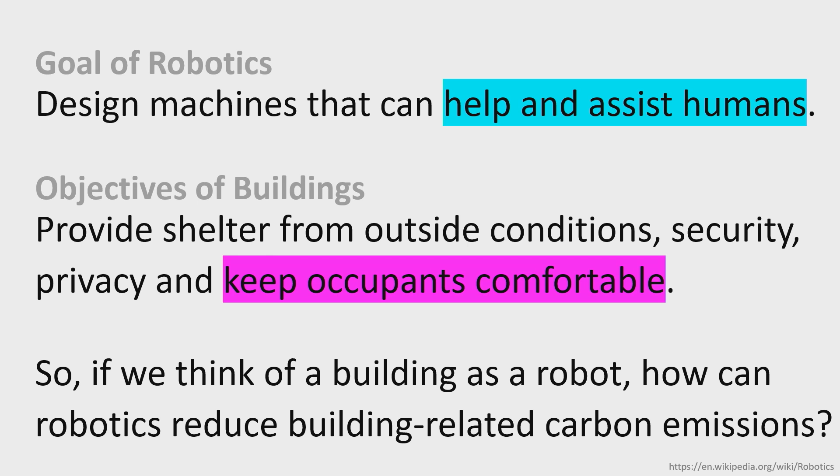So again, coming to my soul searching, what is robotics? I looked to Wikipedia, and basically the goal is to design machines that can help and assist humans. That's, I guess, broad enough. And so I thought, well, the objective of a building is to provide shelter from the outside conditions, security, privacy, and keep occupants comfortable. So again, approach this from the perspective of, does this work? If we think of a building as a robot, how can robotics reduce building-related carbon emissions? And feel free to interrupt me anytime. This should be as interactive as possible.

And I try to use some of the slides that I often use when I talk about buildings and climate change, but then infuse some ideas and opportunities where individuals with a background in controls and in sensors and actuators can make a positive, really substantial impact on climate change. So again, I thought about, well, what do we have? We have these three relationships here, and I'm mostly going to focus on first giving a sense of how we think. And then, as I said before, I'm always going to link this in to what various kinds of robotics could do.

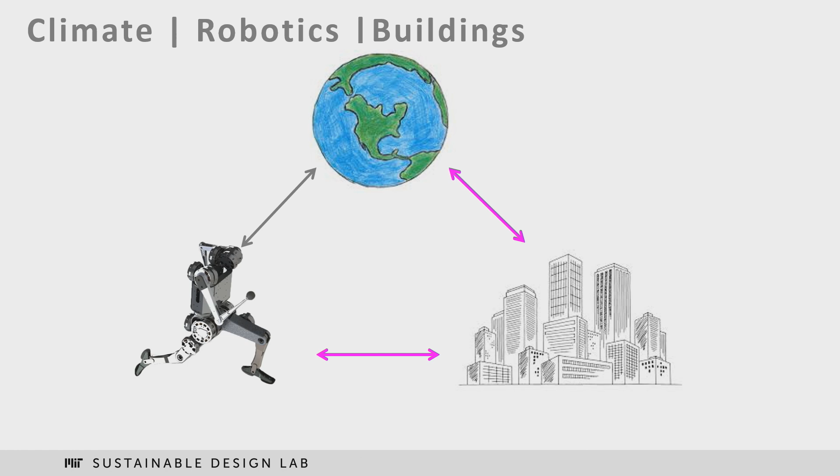So maybe just to frame the whole problem, climate change and the building sector, you've all seen graphs like this. Effectively, the Intergovernmental Panel on Climate Change tells us if we want to keep global temperature rise under 2 degrees Celsius, which is increasingly unlikely, then we have a certain budget of CO2 left to use up and release into the atmosphere. And if we are picking 2 degrees Celsius long-term temperature rise, then we have, that's a good number to know, about 930 gigatons of CO2 left to burn between now and 2050.

And by that point, then we need a net zero global building stock. We actually need a net zero global economy at that point. So it's a bit helpful to have a budget because you know how much you can spend. And if we are looking at it, the building sector is a fantastic 40% of the carbon emissions right now. Kind of shocking, right? So we keep that 40%, but we're going to ramp down like everybody.

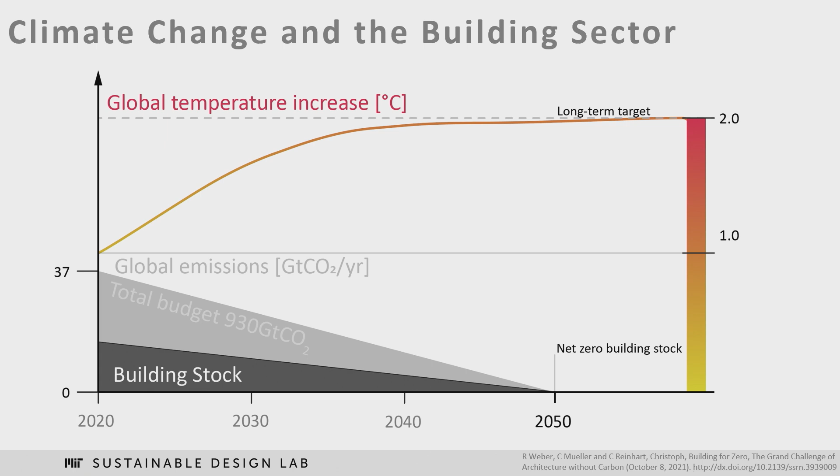Then actually a good number to kind of keep in mind: we have 340 gigatons left and 30 years, more or less, to make the global building stock carbon neutral. So that's our budget, that's our goal.

Now, of course, the building stock is not going to remain static. In effect, we are projecting right now that the global built area is going to double. And if you think about it, that's also kind of incredible, because it means we're going to build in just 30 years as much as we've built, as Mark Wolfov likes to say, in the last 5,000 years. So it's like an incredible amount of construction going on.

I should qualify this. These are the projections, but Ramon Weber, who's coming later, was from building technology as well. We're going to show methods that we want to reduce that number. So, I mean, this is a real worst case scenario. There are certainly parts in the world, Africa, India, where a lot of housing is required. Buildings in North America are completely underutilized. It's really shocking how empty buildings most of the times are.

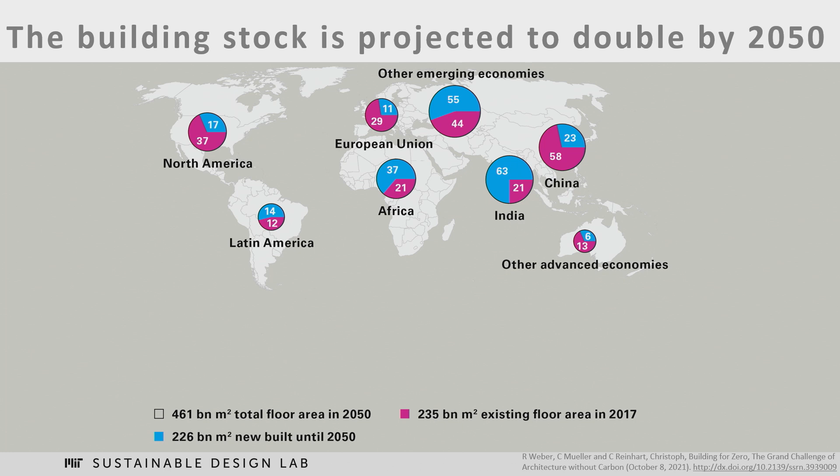And so rather rethinking programmatic space reuse, that's a concern. And that can solve as much as making the most energy efficient building you can imagine: the building that you don't build or that you use more effectively.

But if I'm going at face value, then we made this real simple model a couple of years ago just to basically create a link between climate change and actions in the built environment. And in our business as usual scenario, that's really not that negative. We basically say that by 2050, we finally figured out that all newly constructed buildings are completely carbon neutral, and that we keep the current retrofitting rate at 1% per year. So globally, we are changing every year about 1% of the global building stock.

And if you look at this upper line here, that's, of course, terrible news, because it means by 2050, A, we are not carbon neutral, and B, we use 2/3 of the global budget for all humans. That includes food production. So that's obviously not going to work.

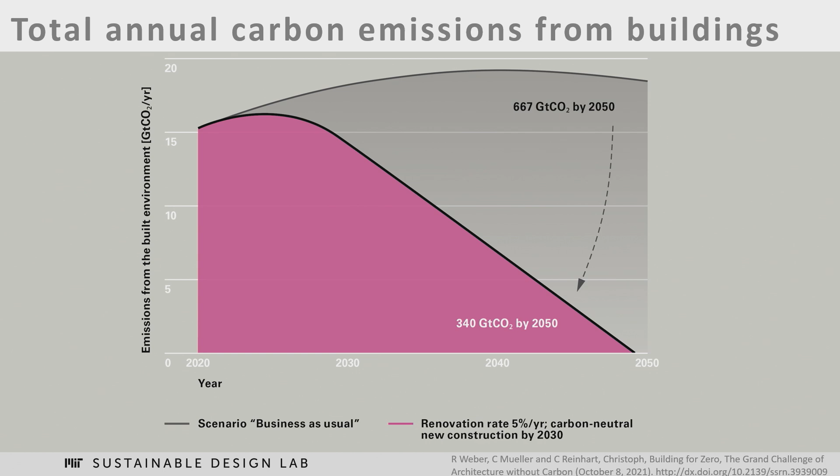So in order to get to this trajectory, what we effectively need, just to pinpoint it: by 2030, we have to increase the annual retrofitting rate up to 5% per year, so a 5-fold increase. There's some really concentrated effort with the governor of Massachusetts office right now that our lab is trying to organize, to just change the rate at which we are retrofitting buildings.

And then equally difficult, by 2030, we need really all new buildings to be completely carbon neutral. And that includes the materials we use to build these buildings. Frankly, we don't know. Some things we know. We know how to build net zero buildings. I'm going to talk about that in a bit. But when it comes to the material choices, there are huge amounts of open questions out there.

So this seems nearly impossible, but at least it gives you something actionable that you can work towards. And I think that's really important when you work on climate change, that it's not just, oh, I'm doing a little here, everything's going to be fine. I think having this big picture for all of you is really important.

So just really practical, what technology pathways actually do lead you to net zero today? And this is something that I use in an intro class called 4.401 every fall. If you're interested in this, this is a class for architects where we have a lot of students from other disciplines as well, where you learn how to model and design a building to be net zero. So you understand basically all the physics and the modeling that goes on when you want to build something like this.

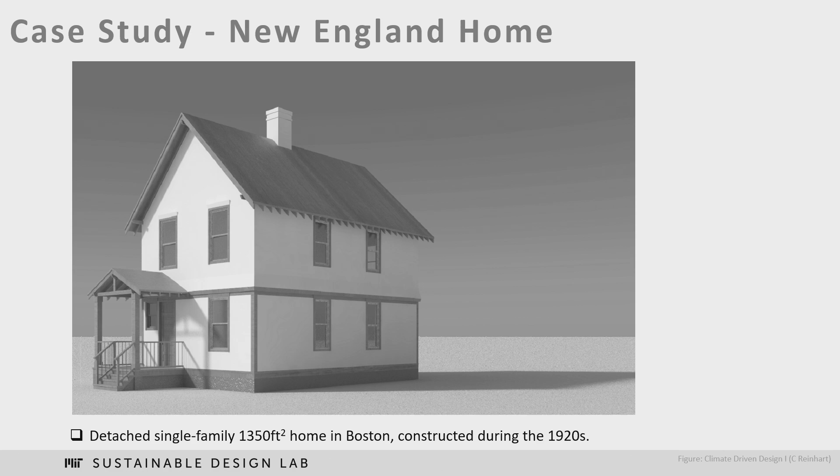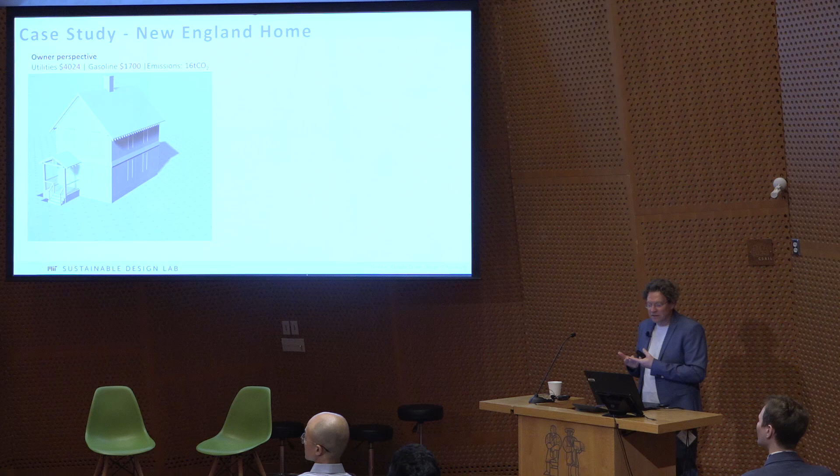And this is the building we always used. It's like the typical New England home, 1,350 square feet, built in the 1920s. At the beginning of class, we assume the owners have done absolutely nothing to their building since 1920. And just to give you a sense of how this would pan out from an owner perspective, they pay for utilities and gas $4,000 a year, and they drive their 40 miles to work, so they have $1,700 on gasoline. And they spend 16 tons on buildings and car usage.

To give you a sense, typically, if you want to live in a really just environment where everybody on Earth can use the same amount of carbon, each of our carbon budget is 2.5 tons per year right now.

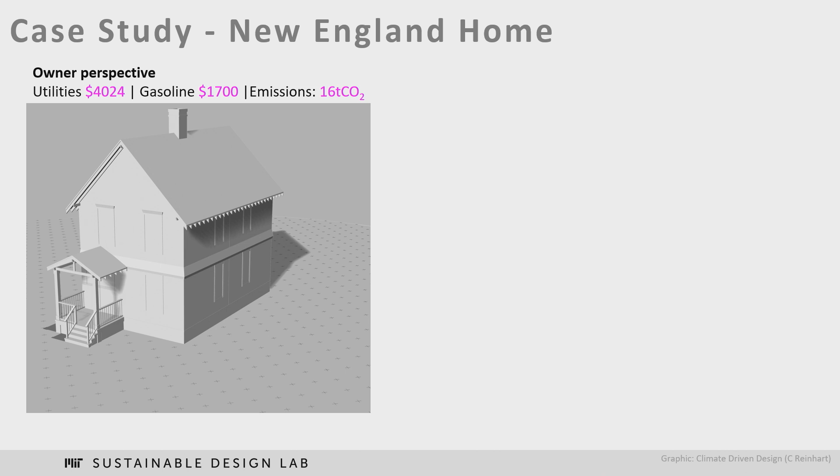So we're obviously burning that here pretty quickly. So this is how the owner looks at it, money usually. And then this is the grid, how the grid looks at this household. And basically you see here hourly the natural gas use and the electricity use for every hour in the year.

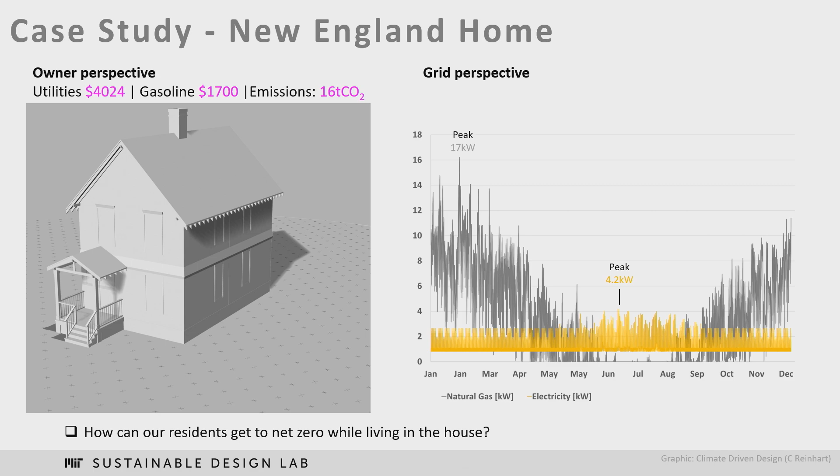And really a key thing is, if you're a utility, you want to sell stuff. But ideally, you want to sell stuff at a constant rate. You don't want to have big peaks, because peaks are a problem. Everybody peaks, the grid becomes unstable, so you have to build the transmission lines. These are enormous costs, right? So this is a bad client.

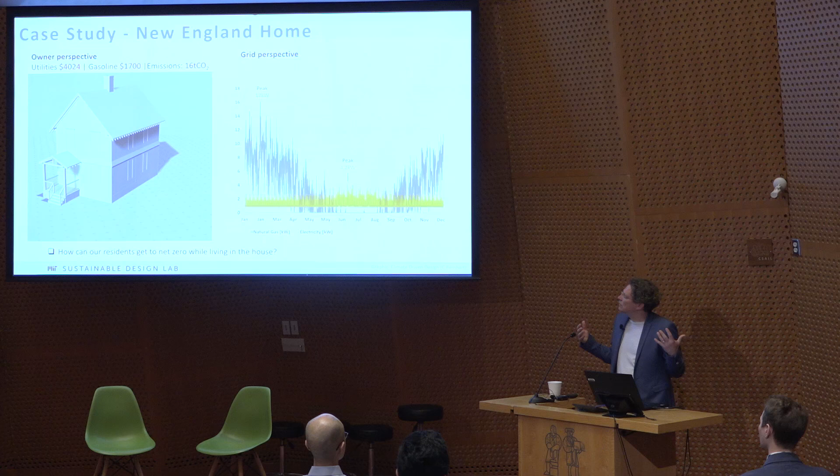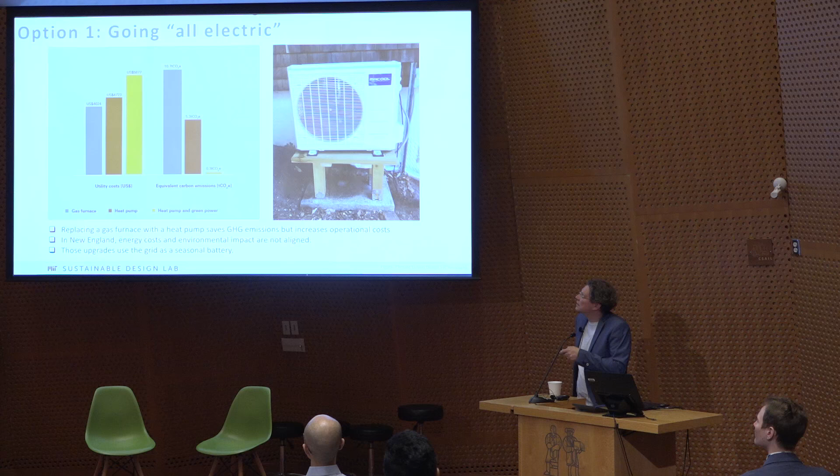What could the client now do? So we're now kind of going on a little journey, how a client could approach this whole topic. And typically, the first thing that we would do is, everybody tells you, there's an official push from Massachusetts and most New England states right now, get a heat pump. So big idea, electrify heating.

What does this mean? We don't want to burn gas. Obviously, we're not going to get there if you have a line where you burn gas. So we want to use electricity because in principle, all the electricity can come from renewables. That's a pretty easy argument. So if you do that, I just put a heat pump in, like one of these mini splits, then you halve your carbon emission. That's great. But your costs go up. And that's really important to notice.

Even though the heat pump is more efficient, electricity is more expensive than natural gas, so your utility bill goes up. If you want to be an extra goody two-shoes for the environment, actually your costs go up even more, then in principle you have a net zero building, but your costs are twice as high as they were before.

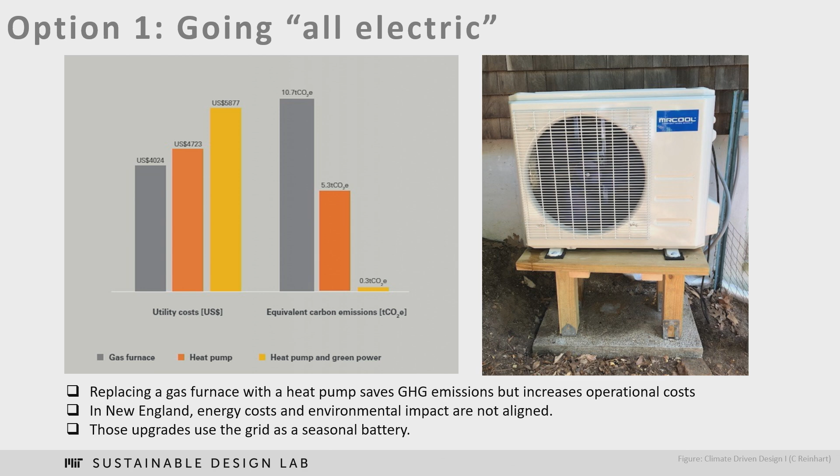So I'm not going to talk so much about that today, but our lab does a lot on modeling equity, adoption rate, who is actually going to pay for things like this. Given the content of today's lecture, I'm not touching on this, but this is obviously excluding large parts of society, right?

But if we take that even further, if I open Google or Netflix, this is the first thing. If you're a homeowner, get a heat pump, get a PV system. If I do what I'm being told and I try to do the right thing, then effectively I can reduce my utility bill if I have a heat pump and PV on my roof. I pay about $50,000 and I go from a bad customer to an absurd customer. Because now I don't buy any natural gas anymore, right? That's gone. So you see in purple, that's my old electricity use every hour.

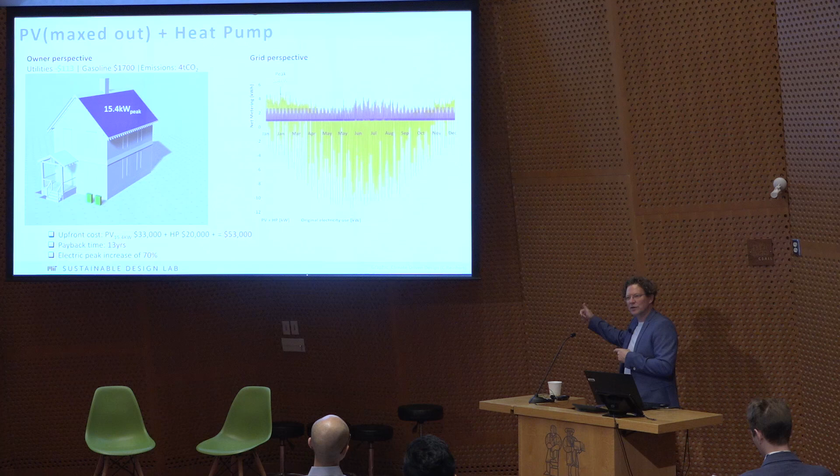And now I have this monstrosity of a PV system on my roof that's way too big, but it pays me to do this. So go big or go home kind of thing. And so you have basically somebody that dumps enormous amounts of electricity into the grid all summer, but the peak, and remember, peak is really what makes you good or bad, is higher. Because on the cold, cloudy day in winter, when your heat pump is working really hard, there is no sun to help you. Otherwise, the day wouldn't be cold.

So this is a problem because you increase, typically we say, in New England, more than double the capacity of the grid. So that's a really big deal. A, we need a twice as strong grid. And B, we don't know where the green power is going to come from in the winter.

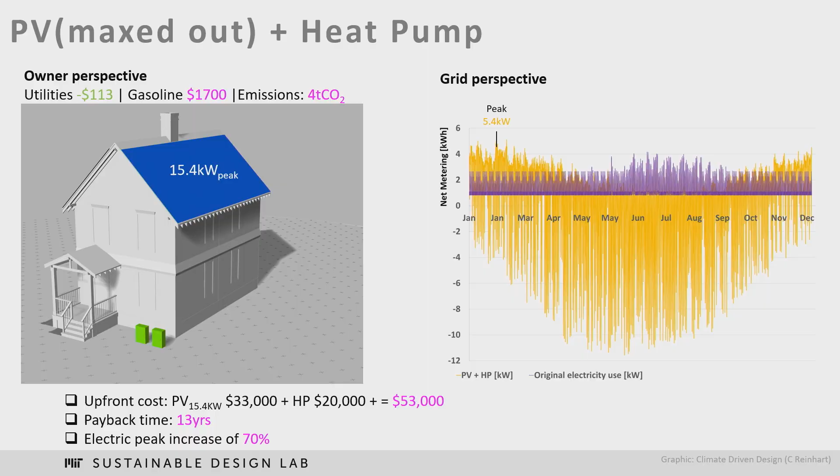If you follow the news, there are discussions with Hydro-Quebec right now to put a hydro line from Quebec to support us in the winter. But some of the other states north of us don't want the hydro line through their territory. So this has been stalled for years right now. So we're in a way following a policy that is not fully logical, because we don't know where that electricity will come from. But this is how it pans out, $53,000 plus a 13-year payback time. And so my big main takeaway or message is really, what do we have to do instead?

We have to basically renovate our buildings. And so this is basically what we're going through in a class like this, where we say, okay, LED lighting, efficient appliances, thermostat. I'm going to talk more about the thermostat because that's as close to robotics as we get in buildings, a little sad. And then air source heat pump, insulation. We basically have to make our building more efficient.

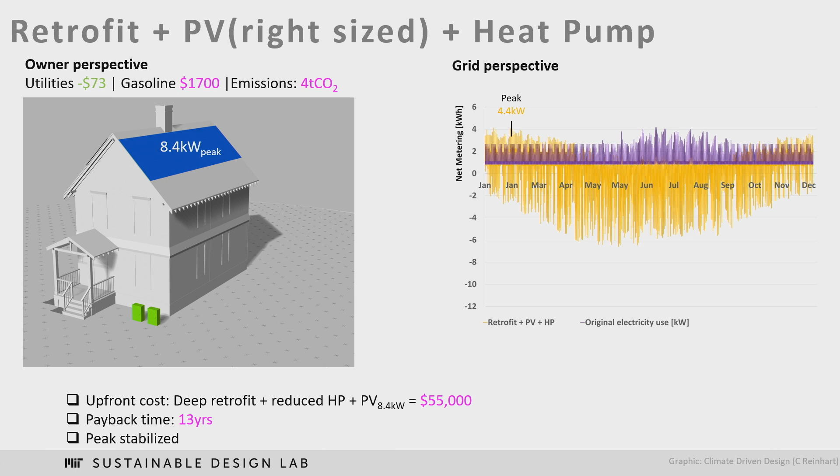And then what happens then? Then we use so little energy that we can get away with a smaller PV system. And if you look at our footprint on the grid, we are a lot less on the grid. So this is a good neighbor system where basically we pay about the same amount of money. I should say it's a lot more.

Doing all of this to your building, especially the renovation, you need a really good partner and a very close household to drive that, because right now that process is really intrusive. Everything takes 10 times longer. So we haven't really figured that out. The retrofitting market is definitely a market that needs to be

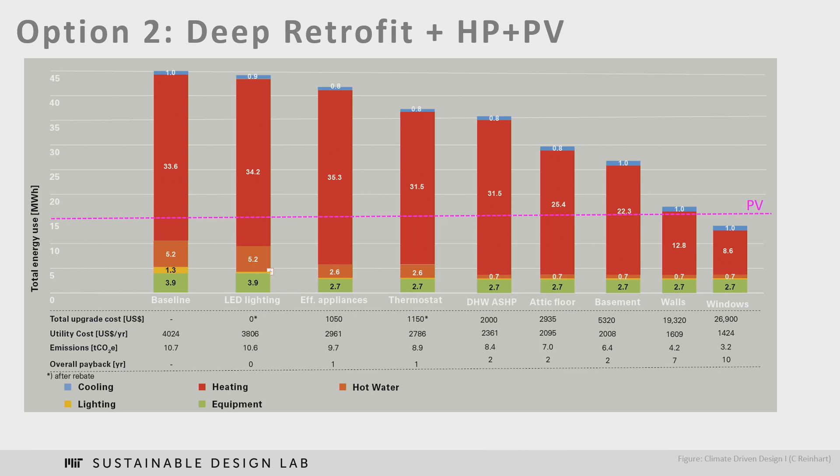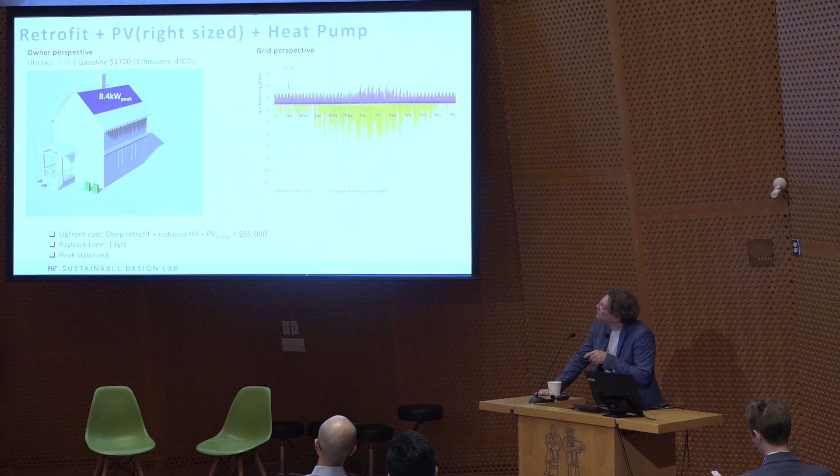changed, disrupted at least. But if we're following this, then the good thing is here we have negative utility bills and our carbon emissions are low. And so this is kind of the ideal that we are striving for, combining retrofitting with PV and controls.

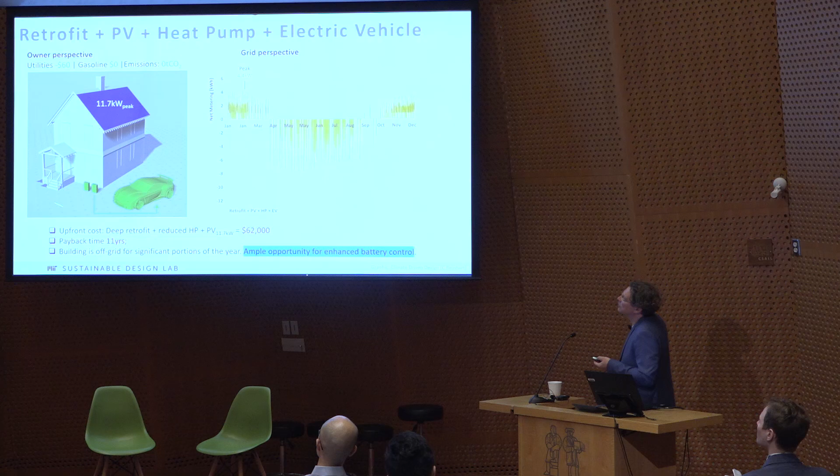Now, actually, the next thing, of course, and that's the smartest thing you can do, you can buy an electric car, because the PV that's going to pay for driving your car is an enormous saver. So actually, if you just for your own pocket want to do the best thing, and it's good for the environment too, the moment you have the PV, you can charge your car every day, and that is highly beneficial to you.

Now, this is probably where my first plea is, and I'm going to talk about this a little more in a bit, but this control is right now really dumb. Basically, all that happens right now is the electricity goes from the grid to your car. And so if you have a non-smart sensor, you just plug the charger in, and it uses huge amounts of electricity. A smart sensor at least delays this until later in the day.

But what you could really think about, this battery can drive your building. Your car battery can basically operate your building for several days. So going back and forth when the grid needs help would create enormous value. Right now, we are not doing that at all, probably due to liability issues. We are not there yet.

Even the Tesla Powerwall, even these kinds of pretty innovative companies, really don't have any smart control algorithms right now that basically work better with the grid and integrate it. So there are huge opportunities, and I actually can't tell you why this is the case.

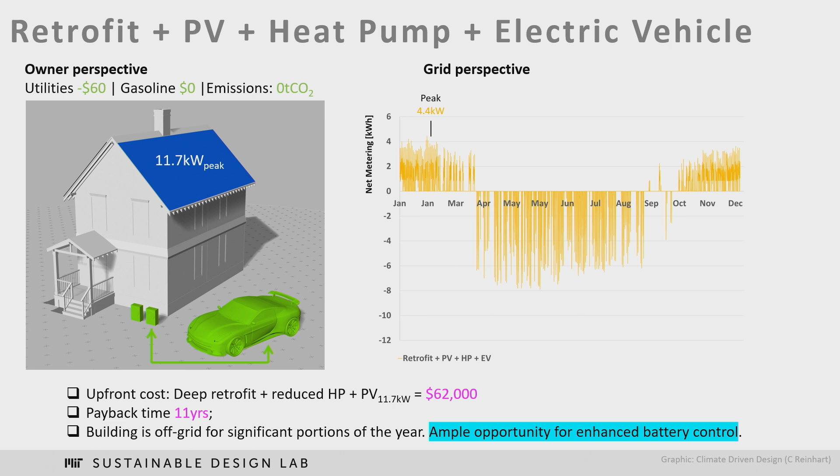So I want to go a little bit now into residential and commercial buildings after giving you a big idea of what can be done. I mean, the interesting thing is when you go into manufacturing, I want you to look at it as when you go into a factory 100 years ago and now, the worker from 100 years ago wouldn't recognize the factory, wouldn't know what to do. And it's kind of funny.

This is from last week, a building retrofit. So the retrofit kitchens that we make today look actually exactly the same as 100 years ago. It even says we are striving to have a 1920s kitchen. So in a way, you're dealing with clients who don't necessarily want a robot. They don't want a robotic arm that cracks their eggs.

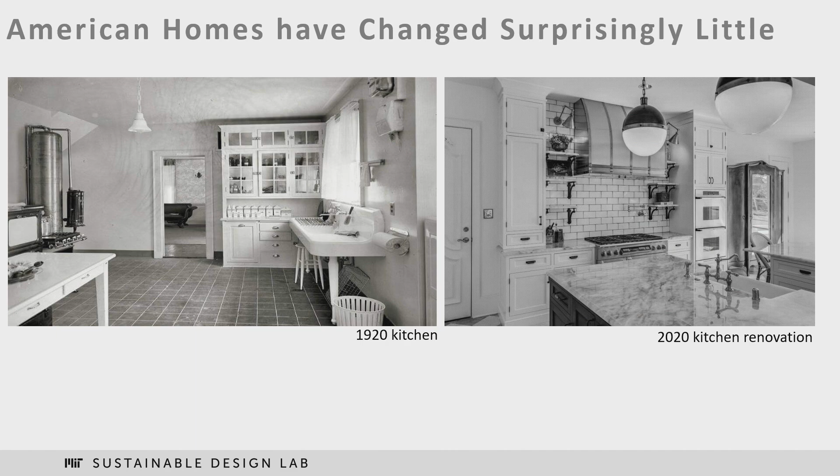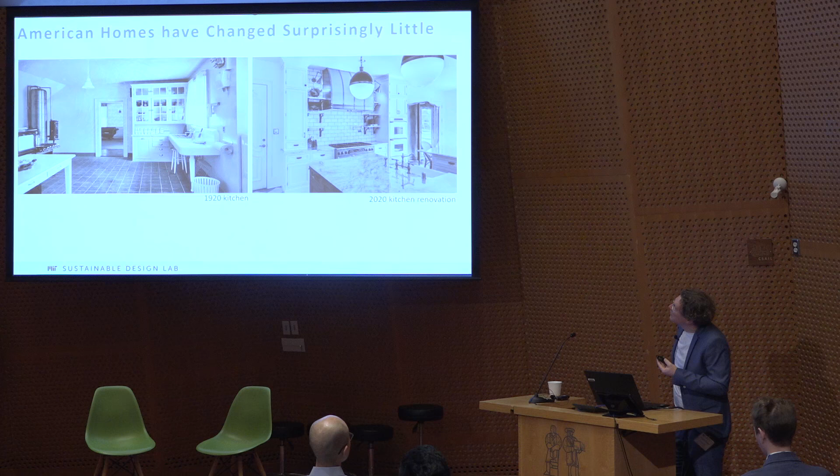There are kind of these hidden ideas. There's of course some intelligence in all these devices here, but overall you're dealing with clients that might not necessarily want something that looks completely different. And then there's of course the big promise of the smart home.

Like the best, if you go online for these LED lighting systems, you see some guy in a basement who basically has like a psychedelic rainbow on there, and you wonder, that's it?

So there are no smarter ways of how we actually use the actuators that we have in buildings right now. So really the only robot that made it into your home is, I guess, a smart thermostat. But what does that really do?

If you look at the old thermostat, of course, what does a thermostat do? There's a lot of surprise. Some people think if you put the temperature really high, it's going to get warm faster. It's not true. It basically sets a temperature range, and your heating and cooling switch on and off when you're in this range.

And then the big innovation of the 80s, 90s, the programmable thermostat, was to say, hey, during certain times you don't have to keep it as hot or as cold. It took a PhD, probably from MIT, to program this system. So really the main innovation was that the self-learning thermostat tries to do that for you, right? But it hasn't really done much. I think mostly what the smart thermostat does is try to learn and adjust the schedules a little bit of when you're in the building and when you're not.

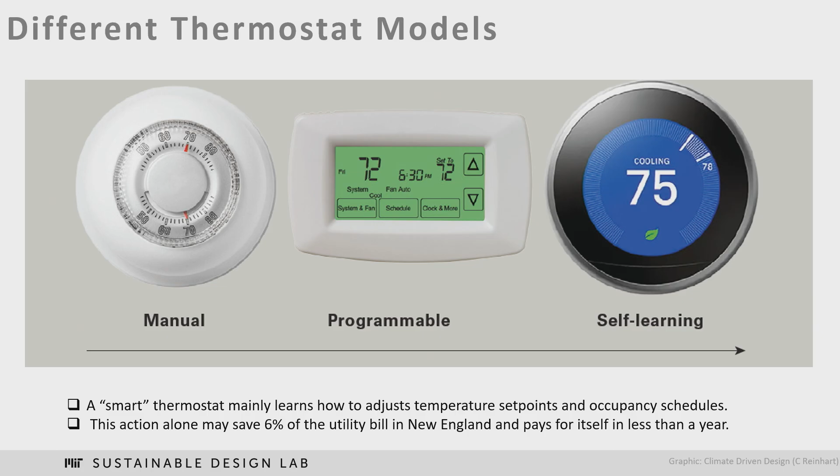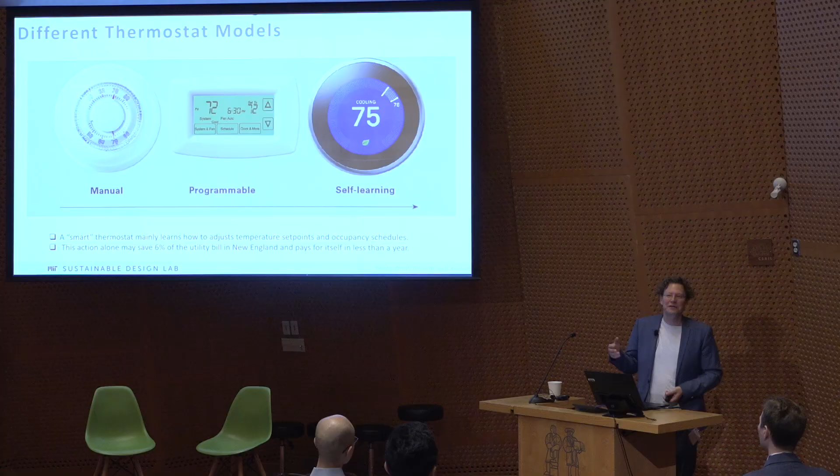And then, does anybody have a Nest? Yeah, so every so often it wants you to feel good and says, if you now turn the thermostat down a little bit, you get a green leaf as a reward, and then it says, hey, you can live with 75 instead of 76 degrees Fahrenheit. There's really not much. The sensor doesn't think beyond the space. And I just want to show you, as an example, how much a sensor could think beyond the space.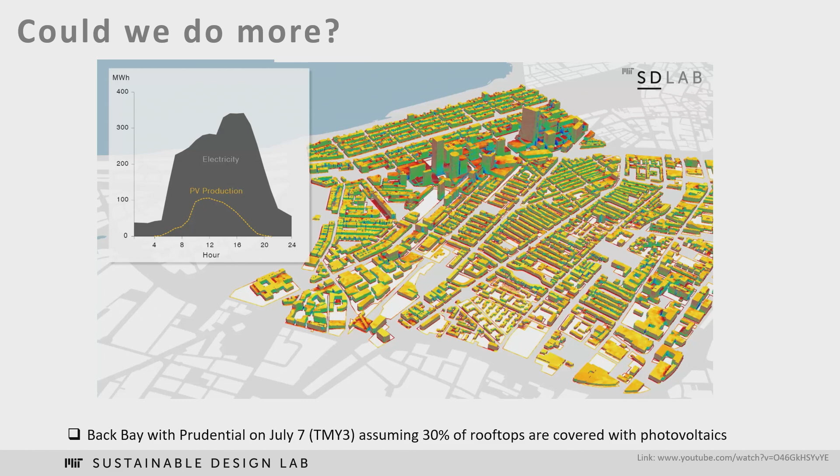So this was a study we did a couple of years ago. We do this urban analysis where, similar to the analysis of an individual building you saw before, we model a whole city, a whole state actually. Right now we're modeling Massachusetts, every building. So then we have these load curves, and on the hottest day of the year, this is Prudential Center, Back Bay, Boston, you see the electricity use by time of day. And if we were to cover a third of the rooftops with photovoltaics, you see the yellow line here. So in the middle of the day, most electricity is being generated.

And you see this mismatch here. When we look at this, it becomes clearer. If I subtract the yellow curve from the upper light gray curve, I get this funny shape here. The good thing is I reduce the peak, and peak is royalty, so if you manage that, that's a good thing. But at the same time you created this really large ramp. That means in just 2 hours you would have to nearly double the amount of electricity that you provide. The utility doesn't like that at all, because you want things just running and humming along, happily making money.

The worst thing is when you suddenly have to call your extra providers and say, in the next 15 minutes, please turn on your peaker plants. That's expensive, and usually not very clean. So this is not the curve that you want.

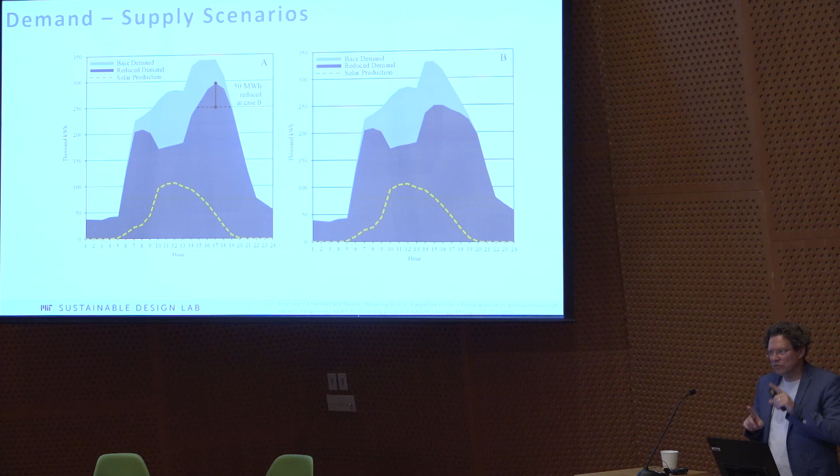Now, what you could do actually for free, if we just had control over thermostats within 3 degrees Fahrenheit, which most people in a building wouldn't even feel, is basically tunnel through these 2 hours. So this incredibly simple device, with some algorithm and some control lines, would for free reduce your peak by as much as covering a third of all rooftops with photovoltaics. That gives you an idea of how big that is.

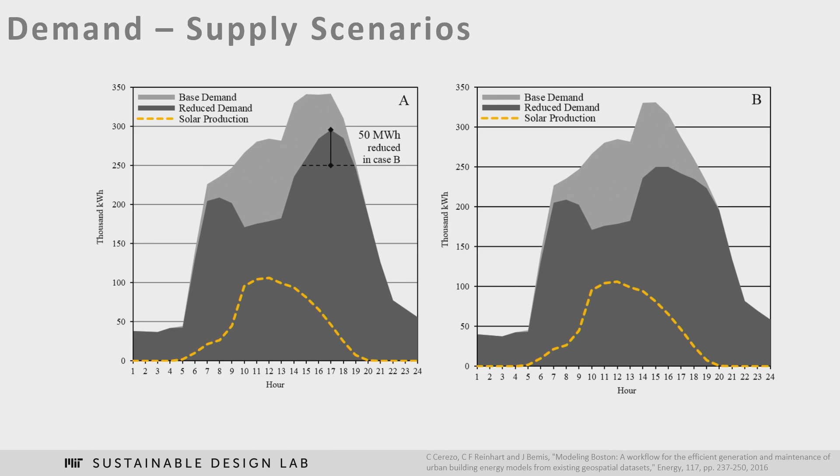And after that paper, we could go a lot further. A smart learning thermostat could train and understand its building over time. Imagine your thermostat does some experiments. Every night, or when it knows nobody's in the building, it's like HAL, but in a benign way. It basically drives your temperature up or down and gets ramps: how does your building react when it's hot and cold?

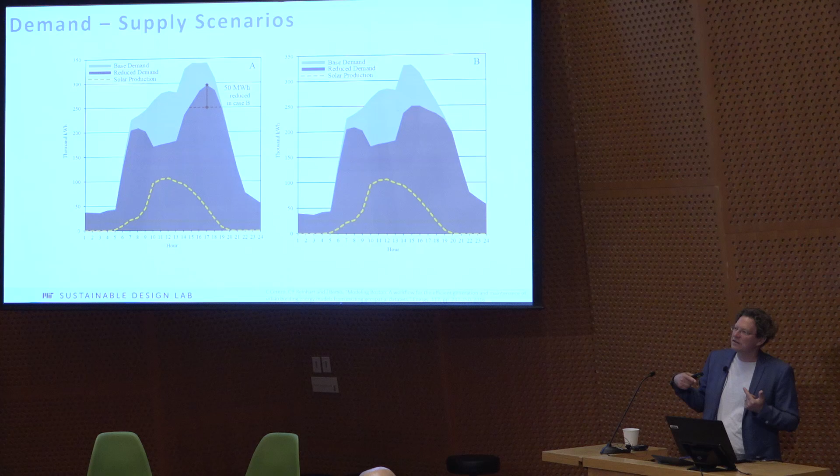And when you know that, then your thermostat can really easily figure out what to do, say, if they get a signal from the grid: please save right now. They could do things to your buildings you wouldn't even realize and flatten the load curves that way. And if they then had your electric car there, where they take electricity and dump it out, you could to an enormous degree flatten the load curves overall.

And so, is this robotics? I don't know, but I know this is something we really need to do, and there's incredible value in there for society in general. This is, I think, control theory's best application: use existing devices and just make them operate more efficiently.

How long do you want me to talk? I have a lot more, but I want to keep time for discussions. I think 15 more minutes. 15? 10. Yeah, no, it's good. I can keep talking, but I want to engage with you guys as well.

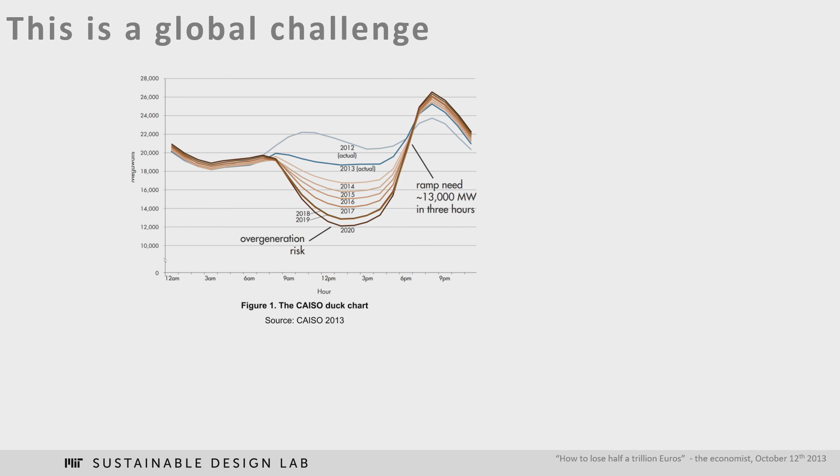So just to give you a sense, this is not an isolated New England phenomenon. This is the CAISO area, a large electric area for California, where photovoltaic is most widely used. And you basically see how over time, what I just showed you in this little simulation study happens for the whole state. We actually call this the famous duck curve. And it's really hard to find a duck that follows this line. That's really a goose.

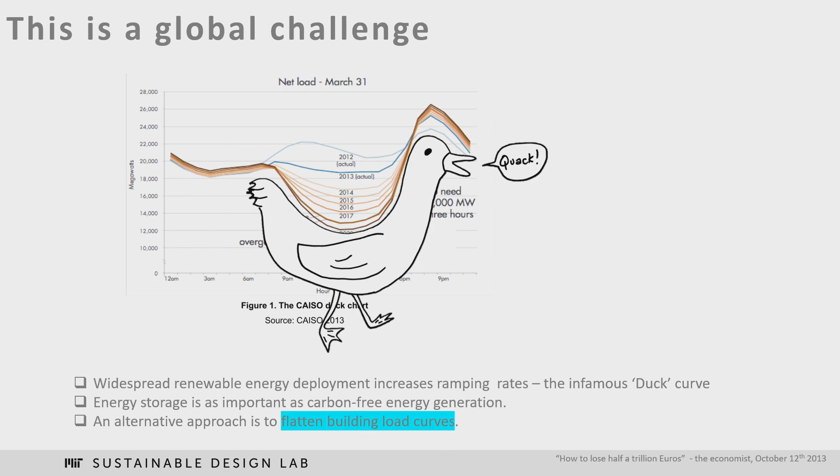But whenever you hear that, that's one of the terms that people in the electricity grid controls industry are using. And of course, the duck curve shows you why storage is so important. So everybody who works on cheap electric storage is a hero, because the renewables are at a point right now where they're only as valuable as our ways to mitigate. We don't just need the peak photovoltaic that we are generating.

I heard last week from a speaker that Germany, and it's not a sunny place, last year had 400 hours in the year when photovoltaics created more electricity than the grid can take. At that point, you get paid to use electricity. Crazy, but it's true. So this is when things such as a battery that has control to charge are very valuable. And there's a lot of theory, if you look at the work from Les Norford at MIT, called model predictive control, where we predict what's happening on the curve.

So for example, you can buy an expensive Powerwall battery, or you can just cool your building to the lowest possible level. And then everybody might come in: what do you do to your building? You're wasting all this energy. It's actually really good. You have excess power, you ramp down until people are nearly freezing in the building, and then you let it go through the peak. Things like this are incredibly valuable. You basically use the concrete in the building as a thermal battery.

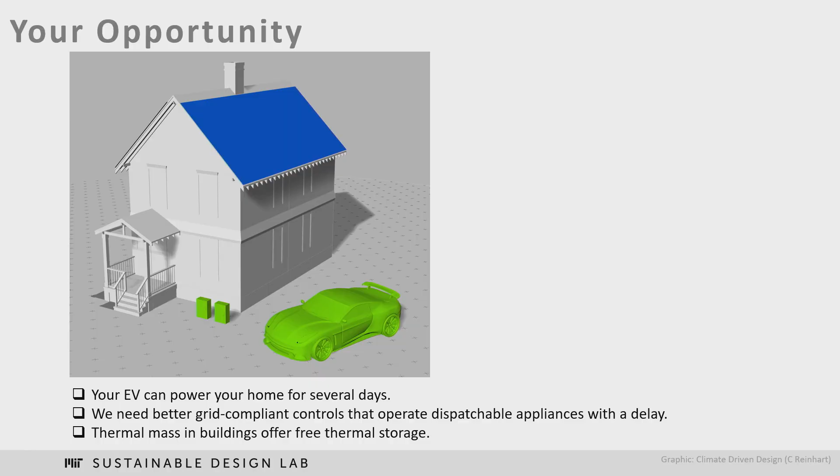So there are just enormous opportunities when we work together on that. And a lot of that isn't new, but it's not happening. It's really surprising in a way. So I think this is more or less what I talked about before. I have two more topics. I want to talk about the campus, because we're all at MIT. We should make the campus better.

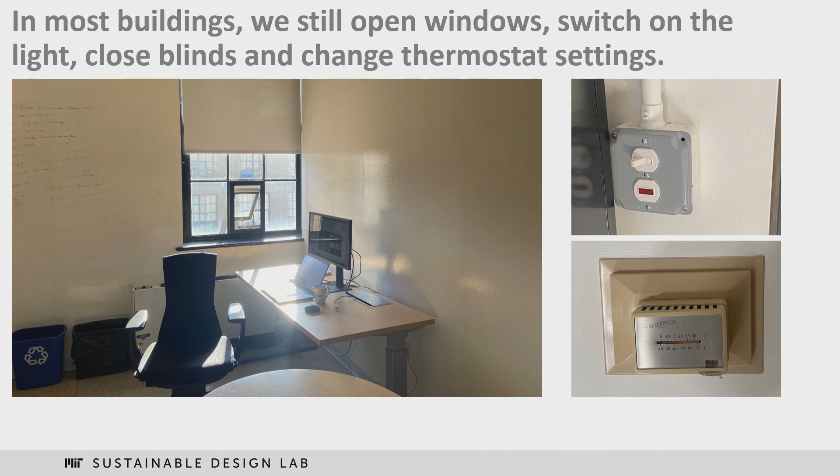I had just some musings about this, my office. It hasn't really changed. I think it was a bathroom in the 1920s, but whoever had been in my office would probably have a really easy time. This is probably from the 1960s, if I'm lucky, my light switch. This thing, I actually don't know what it does. It doesn't work, despite my complaints. So the thermostat does nothing.

The window works, but in the 90s we used to be able to open them in the main group. We had these double hung windows. MIT was built to be well naturally ventilated. That's kaput. So all the windows are basically shut tight and have a window the size of a shoebox to get some fresh air. But overall, at least I can adjust my comfort. And we know people are happier in buildings when they can adjust comfort.

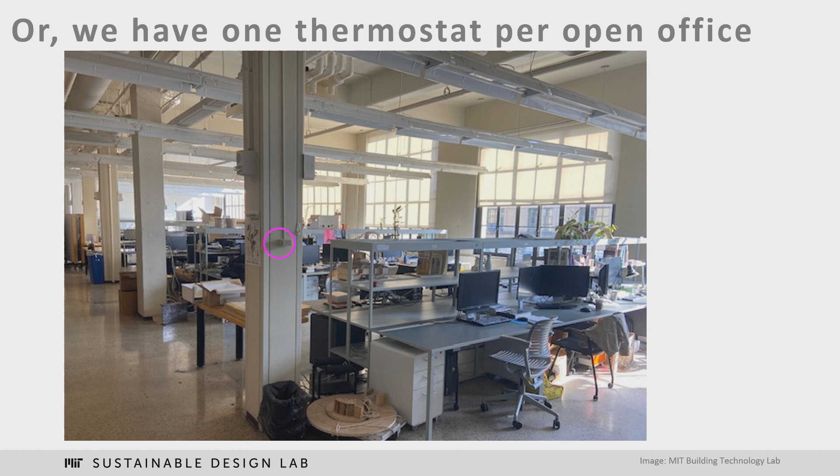This is where the building technology students are sitting. There is one thermostat for everybody. There are thermostat wars, basically, which happens all over the place in open offices. Some person is cold, some person sits right there when nobody looks, changes the thermostat. That happens.

So a couple of years ago, a company tried to overcome that. I'm not sure if you know them, look them up. They're coming out of UC Berkeley, Comfy. And when they started off, they basically had, everybody has an app. You're nothing without an app. And then basically the app asks you, are you warm, are you cold? And then it allows you to switch. And I looked at them this morning. This is actually, full disclosure, an old image, because in the golden days, they raised $8 million in 2016.

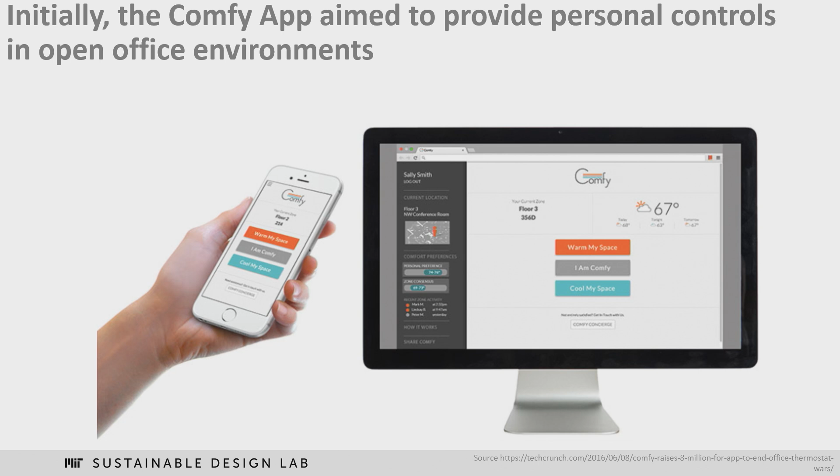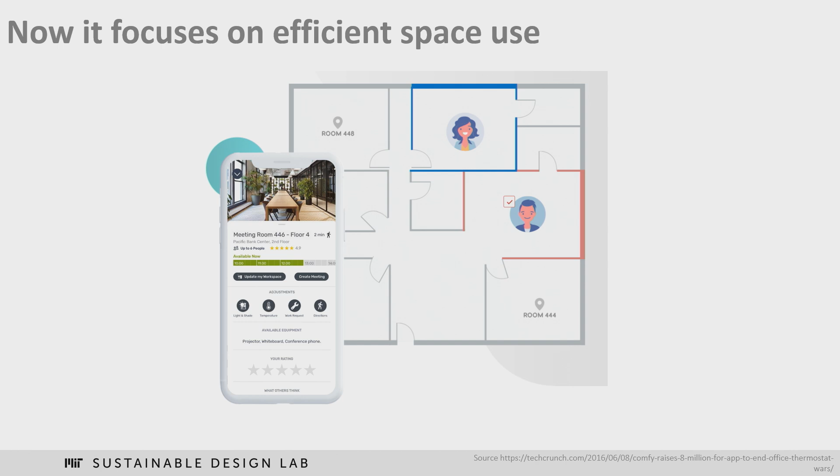Now, that's what they do instead. So they don't even talk about temperature control. It's all about how do you use a space more effectively. So it's a bit sad. I mean, as I said earlier, using space efficiently is a good idea. But it also shows, well, for some reason, these automated controls didn't go very far in buildings. And I wonder why that is. So these are my musings from this morning. I hope there aren't too many typos in there.

So it's funny because we know occupant satisfaction is obviously key. If you want to have some numbers, per square foot in a typical office building, you pay $300 in salary. You pay $30 for mortgage and rent, and $3 for energy. Energy is not a bottom line number, unfortunately, really in this country. It's really the salaries. So the thing is, we know that if you give people controls, they're happier. And happier means work better, means my salary money is spent better. That's at least how the theory goes.

So it's really surprising, that pivot, but I think it's partially because most buildings still haven't kept up. Kind of my theory from the beginning was the buildings are the same. I have less control than I would have had in my office 100 years ago. We just don't put controls into buildings. And part of this is, and nobody can explain to me why, but when you get Johnson, Siemens, any large building management control sensor, you pay a respectable $1,500 to have it installed. It's just shocking. And that, of course, is a huge ticket item. We could give everybody in the room an iPhone that could control this better effectively.

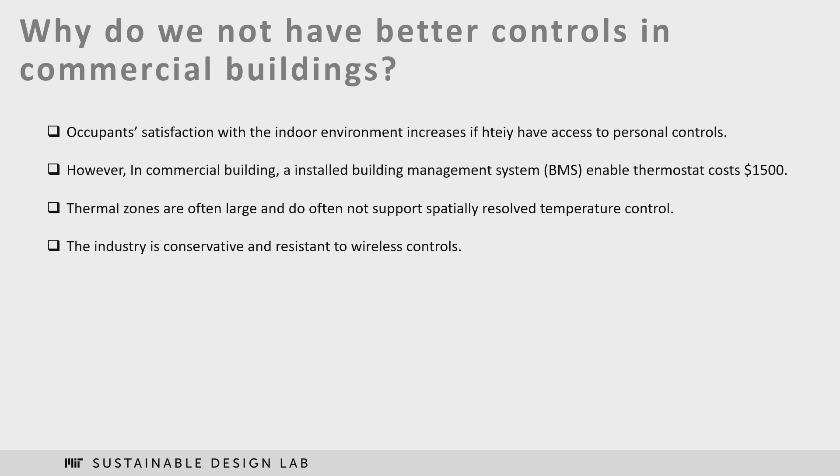The thing is, including MIT, there's a lot of resistance to putting wireless controls in there. I mean, if you look at this atrocious thermostat that I have in my room, obviously putting wiring in there is very expensive, but you could basically just have a wireless control center right now that does the same thing. And then people could come up with a better algorithm to keep my office more comfortable. But there's a lot of resistance. I think it's because of safety controls. When I hear that, I tend to say, this thermostat doesn't do anything to begin with. I wish somebody were to do something to the temperature in my office. So again, I think there's a lot of opportunities here.

I wanted to jump ahead and talk just a bit about the campus and what we're doing here and how some work could plug into that. You probably don't follow this, if you do, that would be wonderful. But you've probably heard that our president is really committed to climate change. In her inaugural address, she really wanted to push climate change, and there are a lot of activities. We again say, hey, let's decarbonize the campus. So by 2050, we want to be at carbon neutrality.

So we have a work group, and at the same time, in order to advance what happens in the working group, I give the seminar called Decarbonizing the MIT Campus. And our goal there is, what would be valid pathways to get our scope 1 and 2 emissions for MIT down to zero? At what cost, what risk, how fast? Scope 1 and 2 emissions are basically energy that we are directly burning on campus, such as natural gas, or electricity that we purchase. This is the sad graph of the last 10 years, which shows there's a lot of dynamics going on because we added a lot of buildings, but the carbon emissions haven't gone down.

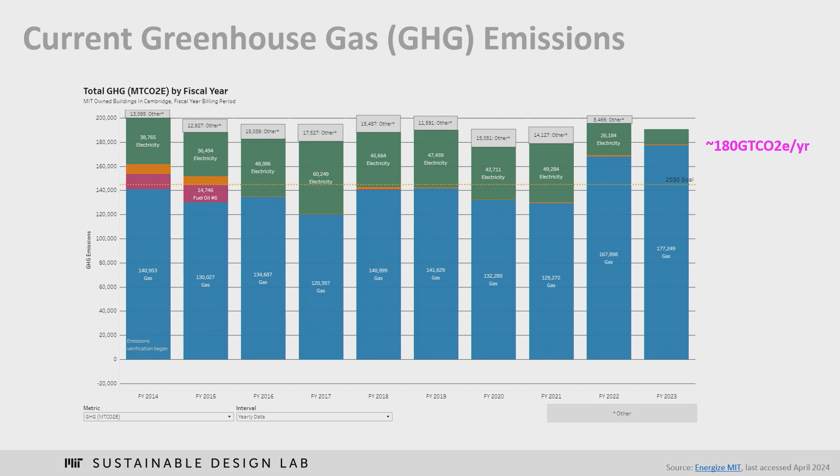And this is, if you go to Energize MIT, all of you can go there to see that and how that works. It's just really, really hard. But of course, if we can't do it, how can we talk about the globe and everybody else? So it's a really big effort.

So in the seminar and in this working group, we are basically looking at 10 technologies, some of them that we can buy today, and some of them that we could implement at one point in the future. And then there are, of course, things that we can't control, such as how the electric grid is going to decarbonize and so forth. If you want to learn more, we're going to release in 2 weeks a report on this.

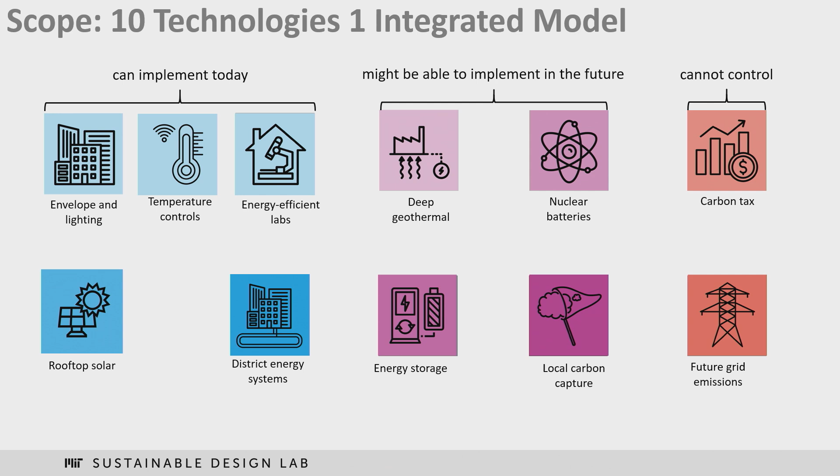And nobody reads a report. What does everybody do? Play with a dashboard. So we built a dashboard where we have 100,000 futures for the campus. So we say in the report what we should do, but again, play with it, figure out yourself how this works. So here we are basically looking at how our campus is operated.

And so here are all of our buildings. Right now, we have the central utility plant between Albany and Vassar Street. We buy a lot of natural gas and a little bit of electricity because we burn that natural gas in a tri-gen plant, which is very efficient when you use natural gas; it basically creates steam and chilled water and electricity at the same time. So we are our own city. We have our own utility. And then we have loops that the buildings use.

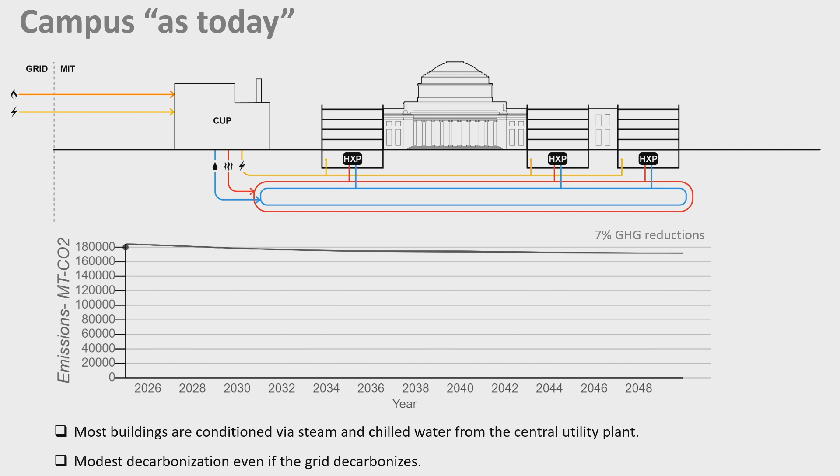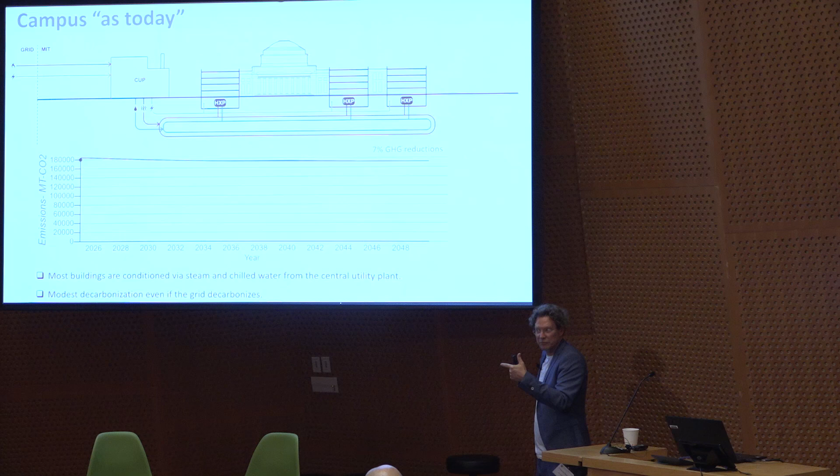Now, if we were not to do anything, then this is our 186,000 metric tons that we use per year. Then even if the electric grid decarbonizes, we wouldn't decarbonize with the grid. That's a really important idea. Why? Because as long as we keep burning gas, we can have the cleanest grid in the world. Nothing's going to happen here. So that's a real problem.

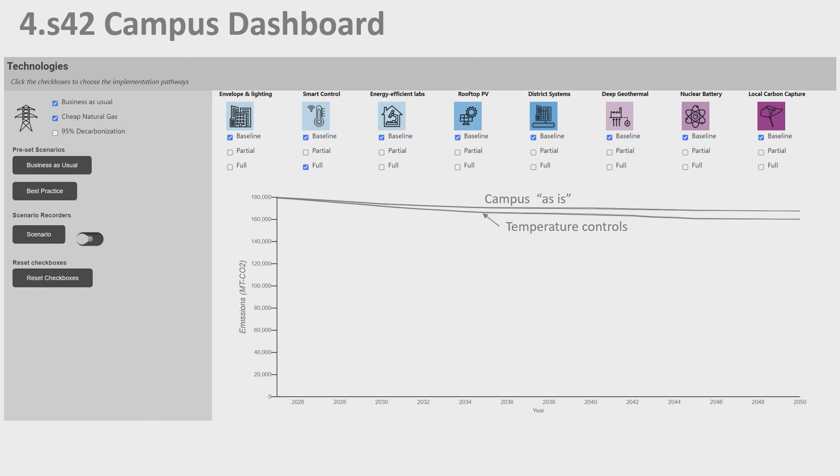But first, if we do the same type of temperature control I talked about, this is what this would do. So just getting some Nest-esque controls in our rooms would have quite a big effect. What space type do you think at MIT uses the most amount of energy? Biolabs, exactly. Not the robotics. We cannot even get close to using that much energy. Why is that? Well, it's for a good reason.

If you look at any buildings that have these stacks here, these stacks are huge, and they're called fume hoods. And this section explains exactly what's going on. We have a space where we might have very toxic material that can come out at any moment in time. So to keep that space safe and conditioned, we have enormous ducts.

In that class that I mentioned, at one point we walked through a duct. You could drive 7 buses through the ducts of the Nano building in parallel. It's just mind-blowing how big these ducts are. If you've not been to the top floor of the Nano building, it's a tour that's going to change your life. You think you're in a Greyhound station. And it's enormous because you pump enormous amounts of air.

This air has to come straight from outside. So if it's cold, it has to be warmed. If it's humid, it has to be dehumidified. Because the people here want to breathe acceptable, good indoor air quality air as well, like everybody else.

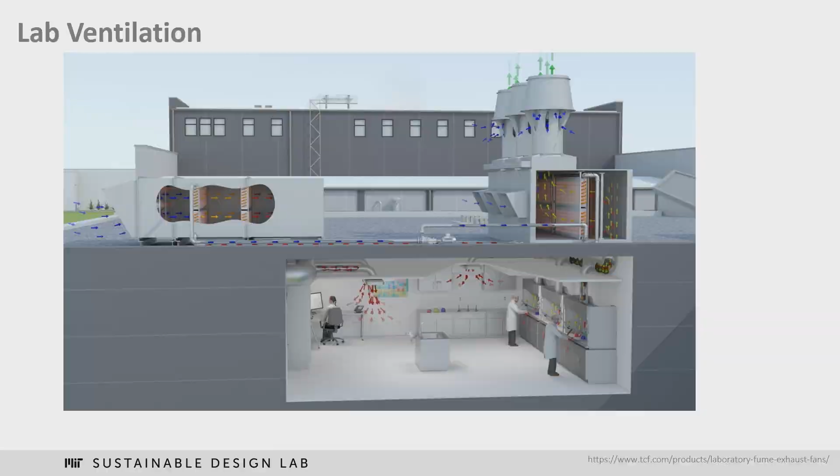So they get this, and then basically it gets pushed out of the fume hood, and these things are like turbines that shoot the air, because it might be toxic, as high up as they can so that it doesn't mix down again. All makes total sense, right? And we want this to happen. I would say the single biggest opportunity is making sure these things stop when they are not being used.

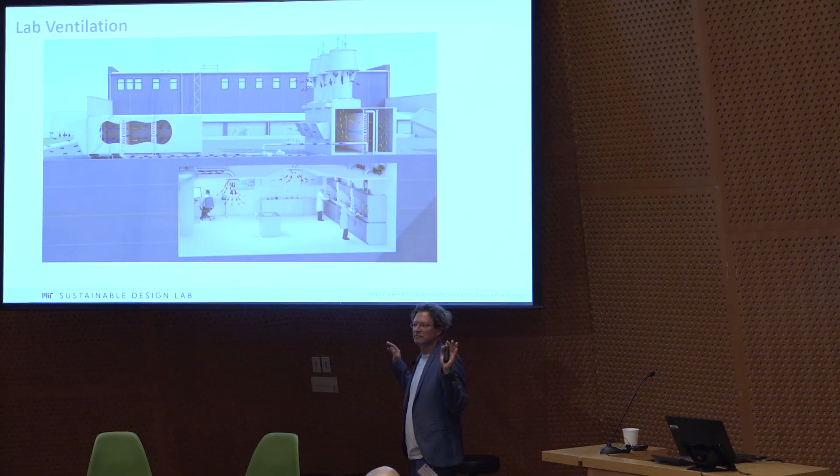This is a lot of money and energy that we are using. So anything we could do to make this better would be great. This is a technology problem, but it's also, of course, a human behavior challenge. People are used to doing work in a certain way, and it's very hard to overcome. And understandably, safety is very important work. But this is probably the single largest thing where better controls would just help.

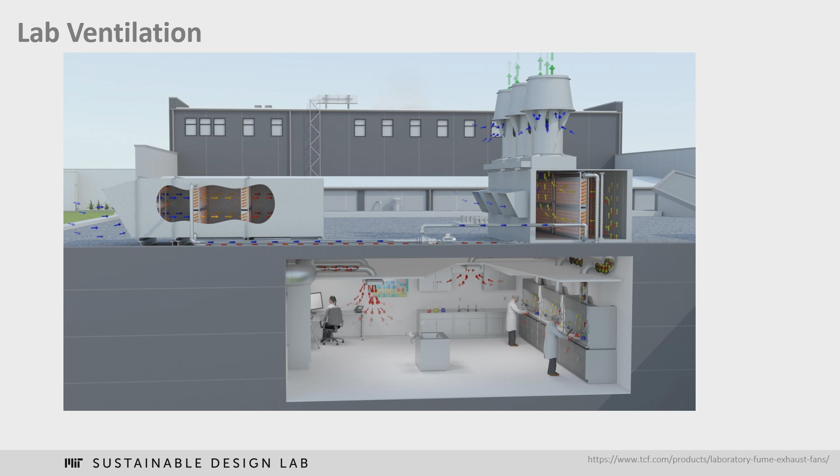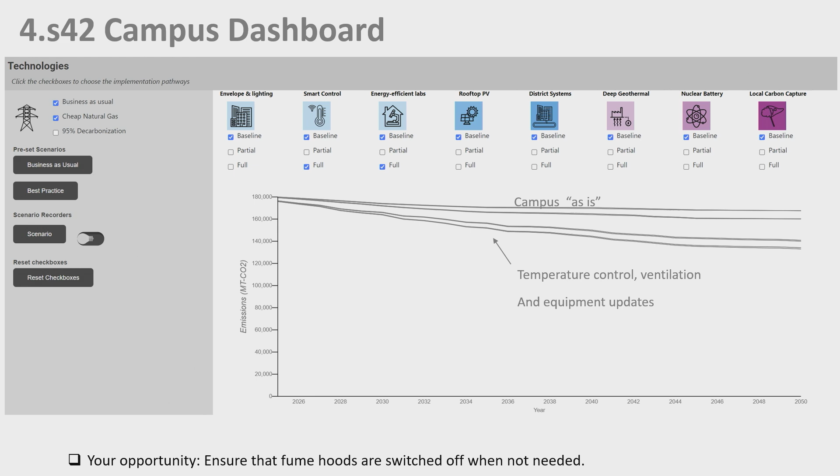I'd even say you could have a control that just annoys the PI and sends them an email every 5 minutes at night when a fume hood is open, so that the next time the fume hood is closed. I mean, these are real big effects. What would that do to our campus? This is how much it would change. So again, controls could make an enormous contribution overall to campus. And we need this along with a lot of other things.

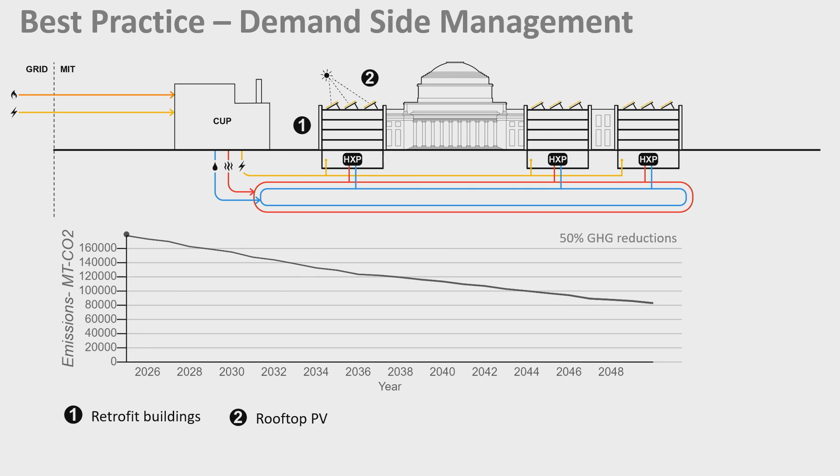So just to give you the full story, what is the vision for the campus? We retrofit buildings, meaning we insulate the buildings a little bit, LED lighting, temperature control, ventilation control. That's going to get us here with a decarbonizing grid, so 50% reduction. And by the way, we cover the roof with photovoltaic, but different to what I showed you for the residential building, that's more a token. It's nice to have, but our energy use is so high in those large buildings. I think we should do it, but it's a very small effect, 5–6% maximum.

So what we really have to do, and a good amount of other universities are doing that, is dig out and change the connection between the central utility plant and the buildings. There are actually 2 things that we can do. First, we change from steam to hot water, which thermodynamically is pretty clear. If you have pipes that are older than me in the ground, with a bit of insulation from over 50 years ago, they lose a lot of heat to the outside. So if we set up the buildings to use hot water instead of steam, that is a saving in itself.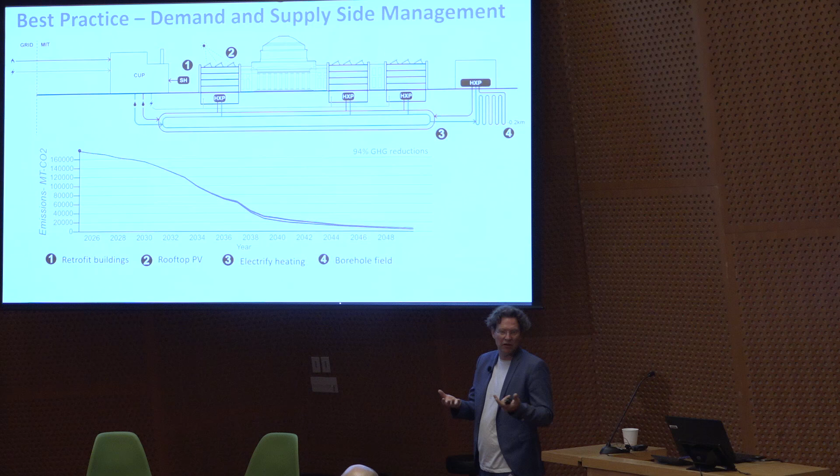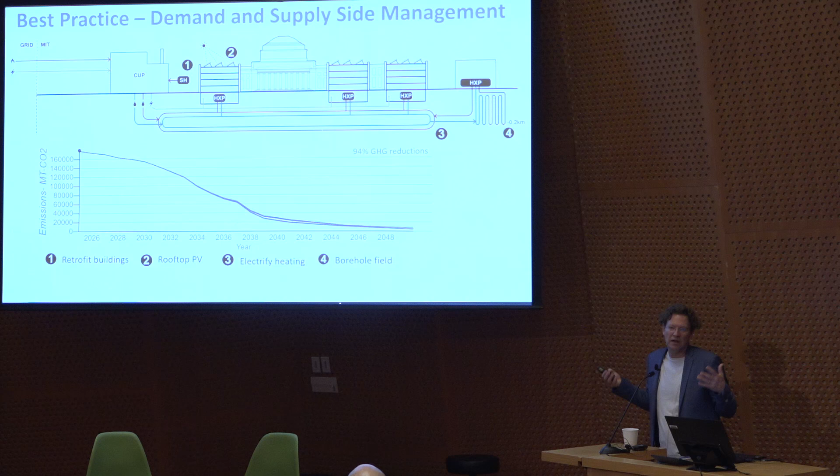And then we can distribute the heat. There will be a lot of talk, and some of you will probably hear debates, because what you could also do is have what's called an ambient loop. You have one loop of warm water and heat pumps that link into it, and some buildings take heat out of the loop, others add it to the loop, and that way you're sharing coincident loads. It's actually not a huge difference. We'll see what's going to happen. In one case, every MIT building will have a basement full of heat pumps; in the other, we have a few huge heat pumps. There are pros and cons for both, but the effect is obviously really good.

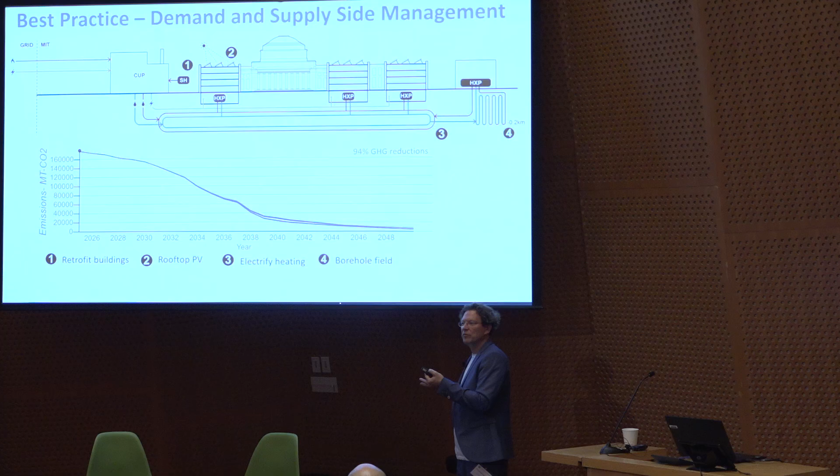So the last thing I leave you with is that this only works if our grid decarbonizes in New England. We are completely dependent on the grid, and we are adding massive loads to it. So that's not a good neighbor scenario in a way. We are probably nearly doubling the capacity of what Cambridge needs without the Harvard campus if we're doing things like this. So this is why MIT is looking at a few other things: one is nuclear batteries, one is deep geothermal.

These are technologies that are nascent, even though a nuclear battery is basically a nuclear power plant that fits into a shipping container, which will be available within the next decade. It's pretty sure that this is going to happen. There's a variety of attitudes toward nuclear energy, but it's fossil-fuel-free, and it's a great base load. So that would solve the problem. With a nuclear battery, you can create heat and electricity. And that's my personal favorite. It's totally Star Wars.

There are people right now that try to use microwaves to shoot holes in the ground that are 20 kilometers deep, like 12, 15 miles deep. And if we could do that, then of course, anywhere on Earth, and there's some serious money invested. And of course, the whole drilling industry is in love with that idea. Because right now, we can already go up to 4 kilometers deep. That's technology. And at 4 kilometers, you already get warm enough water to heat the campus.

But if you go that far deep, you get infinite amount of steam. Well, I would always be very careful when anybody says infinite. But in principle, you get enormous amounts of steam from there. So basically, you get renewable electricity from the ground if you do that. So these are, I think, the kind of thing that our institute should be looking at. It's not clear if we're going to drill that here. But these are basically alternative ways if we really want to think of this campus and getting it net zero somewhat.

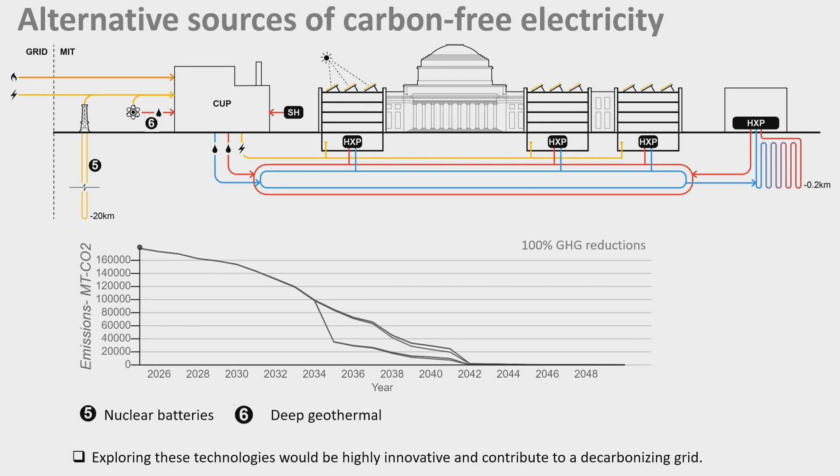Yeah, key messages. I think there are lots of opportunities in buildings to innovate, even with just existing sensors. I think developing new sensor components that you can retrofit or add to buildings at a low cost could have an enormous impact on buildings overall. And definitely worthwhile looking into. 4.401, 4.464, that's the class. If you want to learn more, we are super interested in working with you, basically. Since you're learning how to simulate a building, you can put your own control algorithms on top of that, basically, and start innovating pretty much right away.

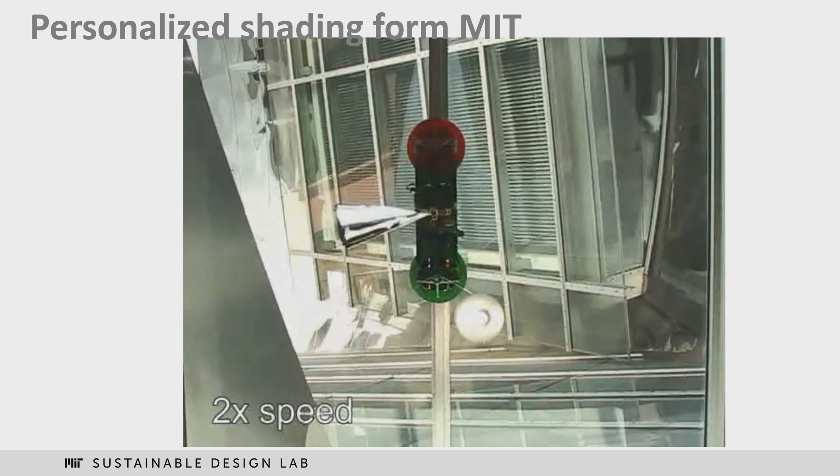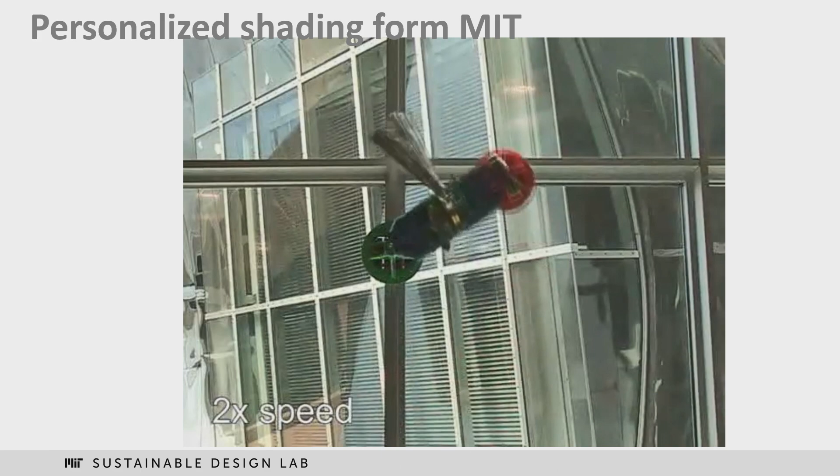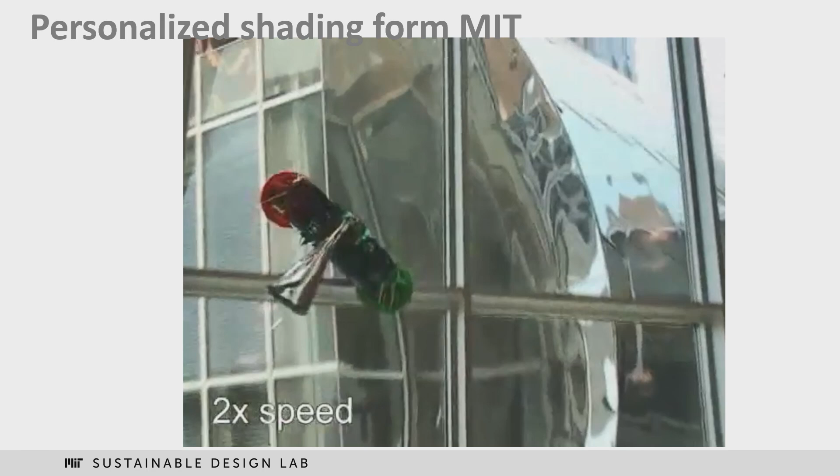And with that, while we are talking, I leave you. Do you all know the shady algorithm? That's the only thing that comes out of this place where we're in right now. This is supposed to be a personalized shading system your peers designed a couple of years ago. This thing is supposed to know where you are. It knows where the sun is. And so it crawls up in a non-threatening way along your mullions. And then in a second, you will see when it's done, it'll provide you with,

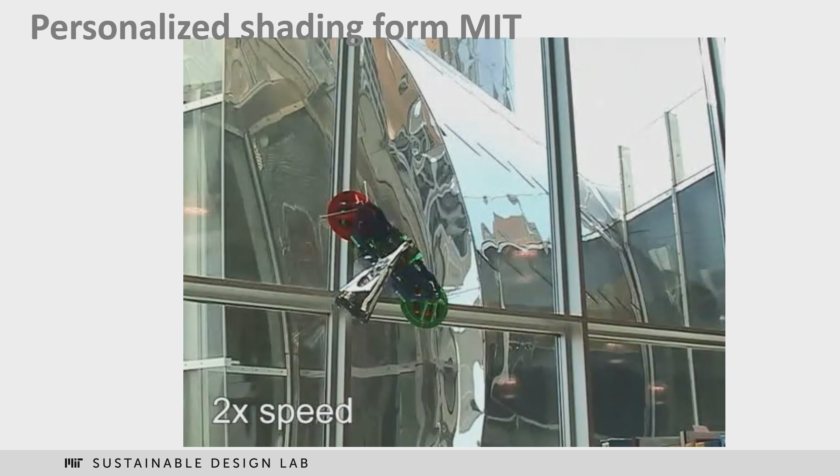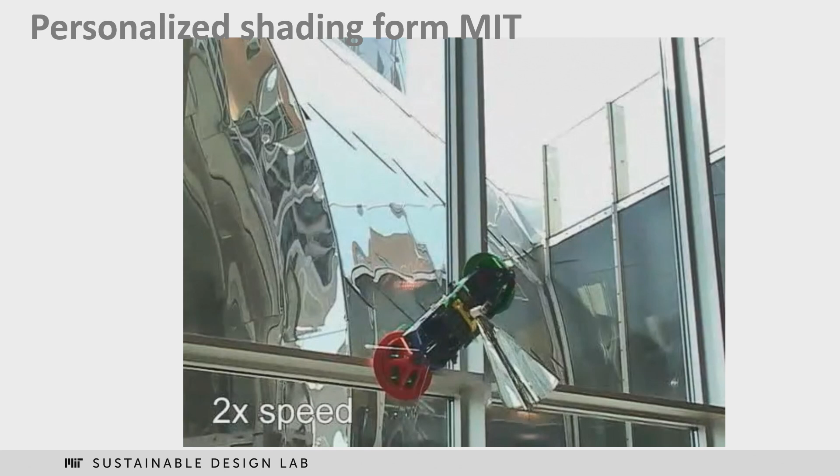I don't know. I have to speed that movie up further. But in a second, you will see the shading device deployed. The advantage of this: if you have 5 people in the room, 5 of them moving around, and if you want the shading, it would just shade exactly you. So in a second, you will see that opening. And with that, I thank you.

So happy to discuss. Yeah, I think I definitely have some questions. Yes, that's great. Go to the audience.

So first of all, thank you for your remarks. I'm curious to hear a little bit more about the adoption story for smart thermostats. To give you an example, 3 days ago, I got a letter from Eversource saying that if you install a smart thermostat, we'll pay you $40 a year to turn your AC down in the summer. That's great. So it means this is finally happening, right? The challenge is I rented a triple decker, and so we don't have central air. Our thermostat, I think, is from the 1960s. We're not eligible for the program. If they don't check, you should definitely do it.

No, I mean, of course, ideally this would be linked to a building. And to give you a sense what I would ideally do if I had controls of it. Right now, probably whenever they pay you, when they are in a crunch, they basically just turn off your thermostat, right? That is kind of the brute force approach. If you were to, as I said earlier, train your thermostat, you want to know ramp up time. Every building has some thermal mass.

So ideally you have a building that heats and cools, where the HVAC system is actually big enough to maintain that level. A building where you can basically relax the temperature so it can get a little warmer in the summer, for example. And then if you have more thermal mass in the building, you could do it probably for an hour. So in an ideal case, they would say, we might pay you. Can we run an experiment on your building?